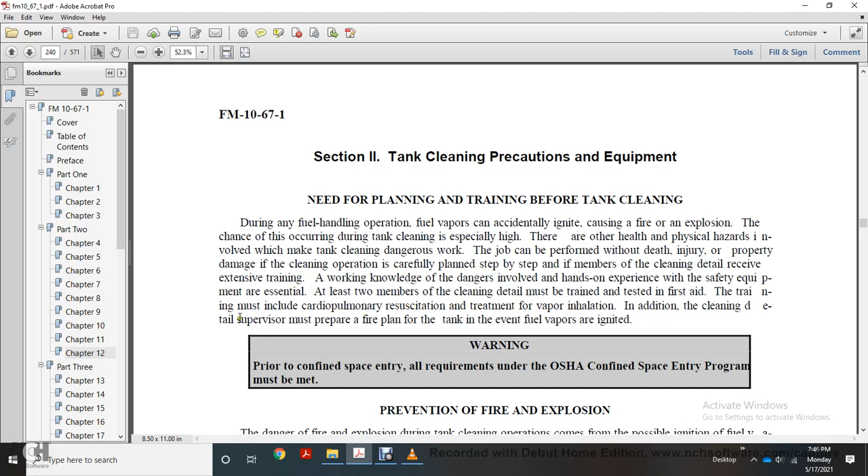The members of the cleaning detail receive extensive training, working with the dangers involved and hands-on experience with the safety equipment that is essential for all members of the cleaning detail. The details must be trained and tested. First aid training must include cardiopulmonary resuscitation for vapor inhalation. In addition, cleaning detail supervisors must prepare a fire plan for the tank in the event the fuel vapors ignite. Warning: confined spaces. All requirements of the OSHA confined space entry program must be met.

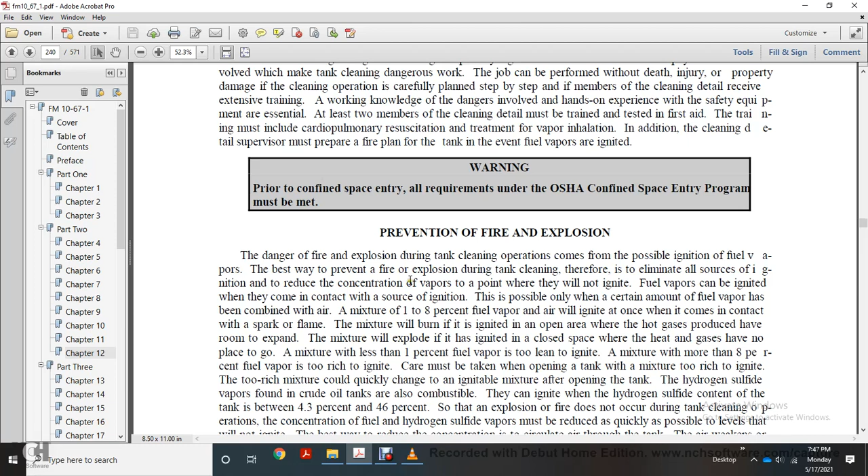Prevention of fire and explosion. The danger of fire and explosion during the tank cleaning operation comes from the possibility of ignition of fuel vapor. The best way to prevent fire and explosion during tank cleaning is to eliminate all sources of ignition and to reduce the concentration of vapors below the point where they will ignite. Fuel vapors can be ignited when they come in contact with a source of ignition only if a certain amount of fuel vapor has been combined with the air. A mixture of 1 to 8% fuel vapor will ignite at once if it comes in contact with a spark or flame.

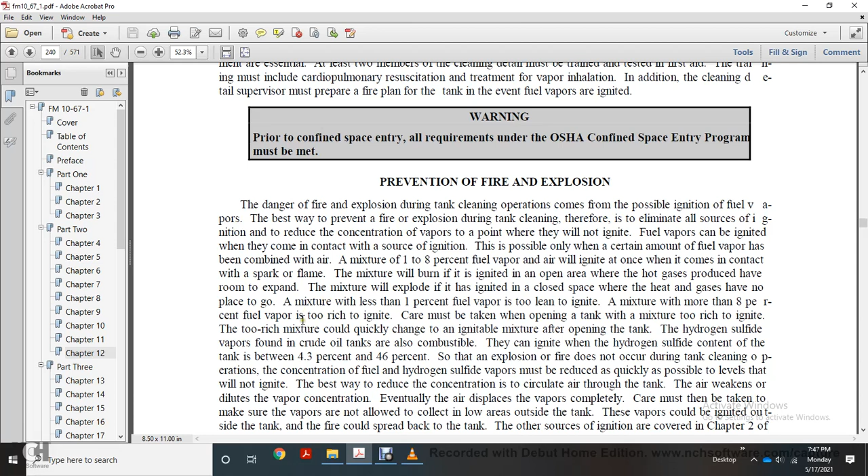The mixture will burn when ignited in open air, where the hot gases produced have room to expand. The mixture will explode when ignited in a closed space, where the heated gases have no place to go. A mixture with less than 1% fuel vapor is too lean to ignite. A mixture with more than 8% fuel vapor is too rich to ignite. Care must be taken when opening a tank with a mixture too rich to ignite. The too rich mixture will quickly change into an ignitable mixture after opening the tank.

Hydrogen sulfide vapor found in crude oil tanks can also ignite when the hydrogen sulfide content of the tank is between 4.3% and 46%. So that explosion and fire do not occur during the tank cleaning operation, the concentration of fuel or hydrogen sulfide vapor must be reduced as quickly as possible below the level that will ignite. The main way to reduce the concentration is to circulate air through the tank. Air weakens the vapor concentration as it dilutes it. Eventually, the air displaces the vapors completely.

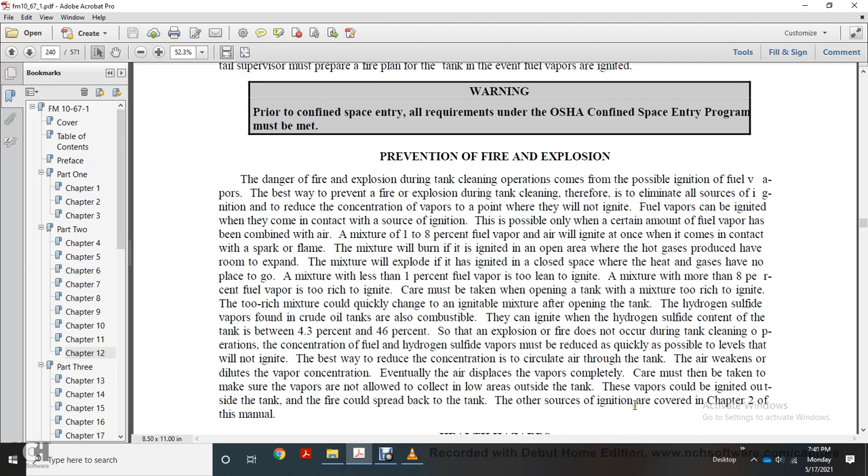Care must be taken to make sure the vapors are not allowed to collect outside the tank. If the vapors are ignited outside of the tank, the fire could spread back to the tank. The other sources of ignition are covered in Chapter 2 of this manual. Health hazards. Until the atmosphere inside the tank has been made safe, the tank is hazardous to health. The danger lies in several areas.

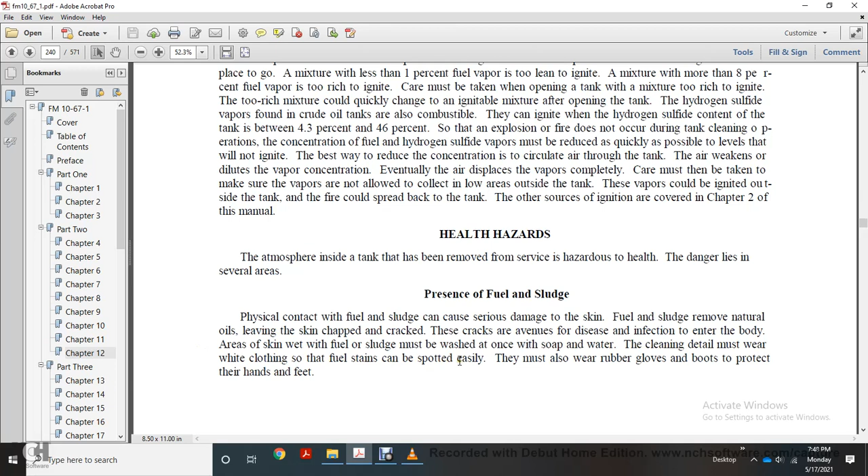Presence of fuel and sludge. Physical contact with fuel and sludge can cause serious damage to the skin. Fuel and sludge remove the natural oils, leaving the skin chapped and cracked. Cracks are avenues for disease and infection to enter the body. Areas of skin wet with fuel and sludge must be washed at once with soap and water. Cleaning details wear white clothing so that fuel stains can be spotted easily. They must also wear rubber gloves and boots to protect hands and feet.

Presence of fuel vapor. Fuel vapors, especially gasoline and jet fuel, are narcotic. Inhaling these vapors slows the central nervous system to the point that breathing stops. In addition, inhaling even small amounts of these vapors irritates the lungs and respiratory system, causing pneumonia and leaving a person open to other respiratory diseases. The toxic limit is 500 parts per million. Cleaning details must wear respiratory equipment while working until tests of the fuel vapors produce readings below the limit. Workers may work in the tank up to 8 hours without respiratory equipment.

Does not apply with a tank that has been used to store leaded fuels. Present is tetraethyl lead. Tetraethyl lead is a poisonous liquid. Contact with tetraethyl lead can result in lead poisoning. Therefore, care must be taken to enter a tank that had been used to store leaded fuel.

Inhaling fuel vapors can kill. The cleaning detail must wear respiratory equipment when working in a leaded fuel storage tank. The equipment must be used even after the tank has been tested and declared vapor-free for inhalation. Dust particles from scale on the walls can also result in death.

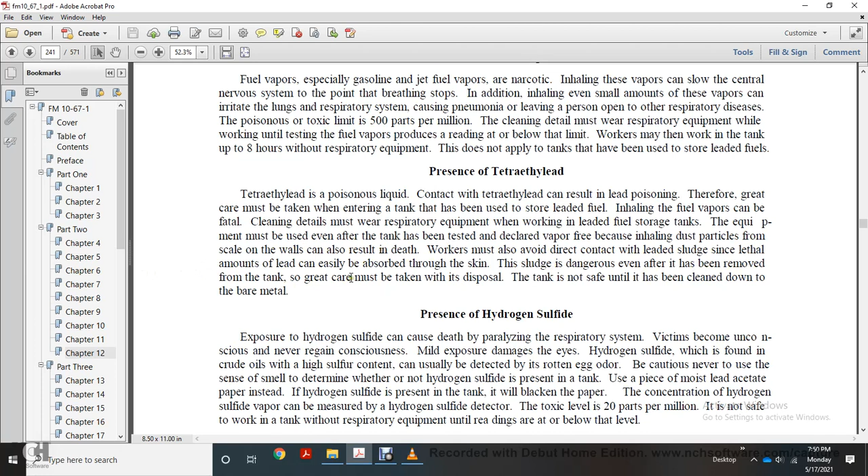Workers must avoid direct contact with lead sludge, since lethal amounts of lead can be absorbed through the skin. Sludge is dangerous after it has been removed from the tank, so great care must be taken with disposal. The tank is not safe unless it has been cleaned down to the bare metal.

Presence of hydrogen sulfide. Exposure to hydrogen sulfide can cause death by paralyzing the respiratory system. Victims can become unconscious and never regain consciousness. Mild exposures damage the eyes. Hydrogen sulfide, which is found in crude oil with a high sulfur content, is usually detected by its rotten egg odor, but it can deaden the sense of smell.

To determine whether hydrogen sulfide is present in the tank, use a piece of moist lead acetate paper. If hydrogen sulfide is present in the tank, it will blacken the paper. Concentration of hydrogen sulfide vapor may be measured with a hydrogen sulfide detector. The toxic level is 20 parts per million.

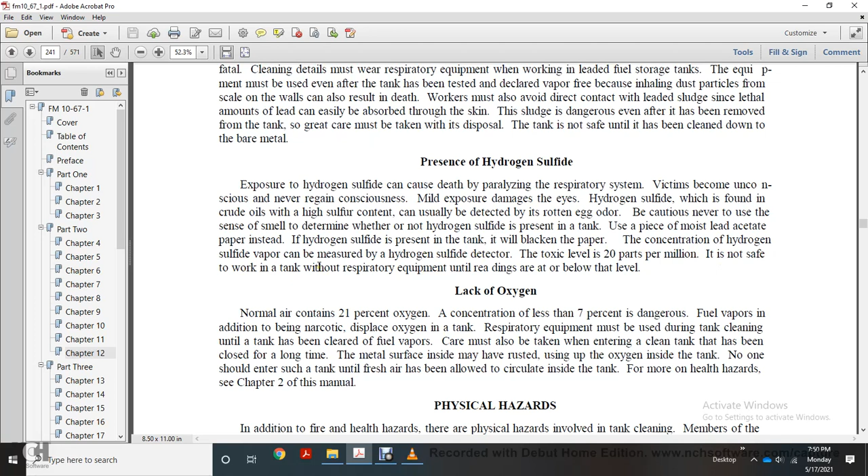It is not safe to work in the tank without respiratory equipment until readings are at or below that level. Lack of oxygen. Normal air contains 21% oxygen; concentrations less than 7% are dangerous. Fuel vapors can have a narcotic effect and displace the oxygen in the tank.

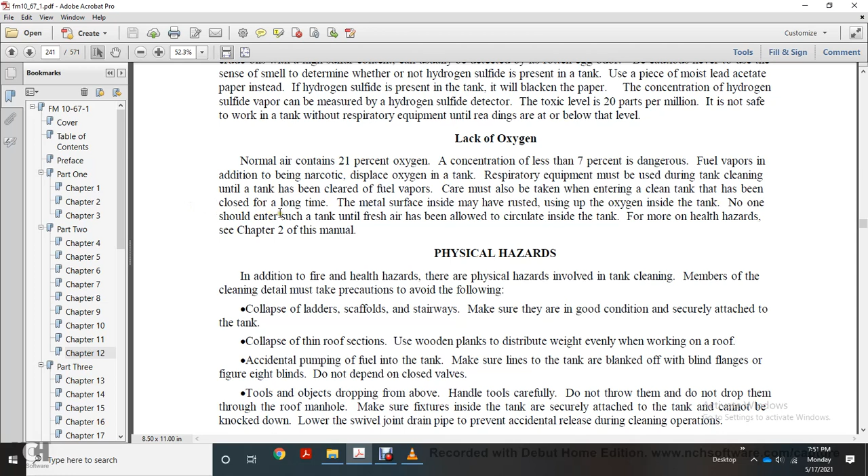Respiratory equipment must be worn during tank cleaning until the tank has been cleared of fuel vapors. Care must also be taken when cleaning a tank that has been closed for a long time. Metal surfaces inside may have rusted, using up oxygen inside the tank. No one should enter the tank until fresh air has been allowed to circulate inside the tank. For more health hazards, see Chapter 2 of this manual.

Physical hazards. Fire and health hazards are not the only hazards in tank cleaning. Remember the cleaning detail precautions. Avoid the following: collapse of ladders, scaffolds, and stairways. Make sure they are in good condition and securely attached to the tank. Collapse of thin roof sections. Use wood planks and distribute weight evenly when working on the roof.

Accidental pumping of fuel into the tank. Make sure the lines to the tank are blanked off with blind flanges or figure 8 blinds, and do not depend on closed valves. Tools or objects dropping from above. Handle tools carefully. Do not drop them through the roof manhole. Make sure fixtures inside the tank are securely attached so they cannot be knocked down. Lower the swivel joint drain pipe to prevent accidental release during the cleaning operation.

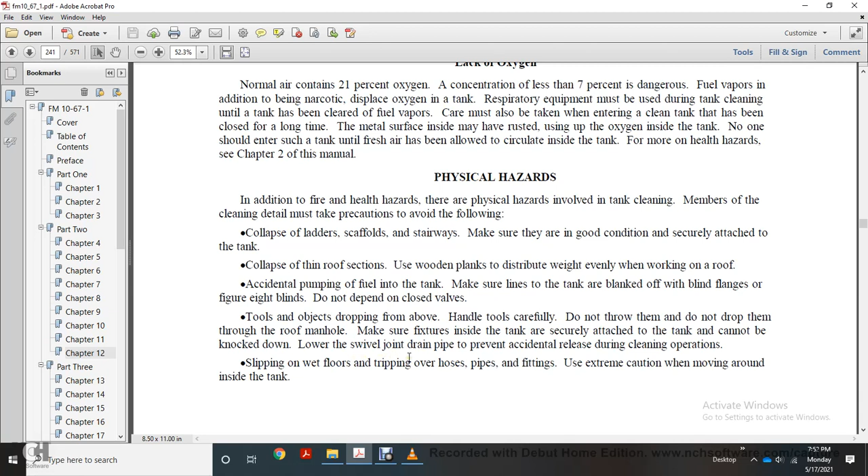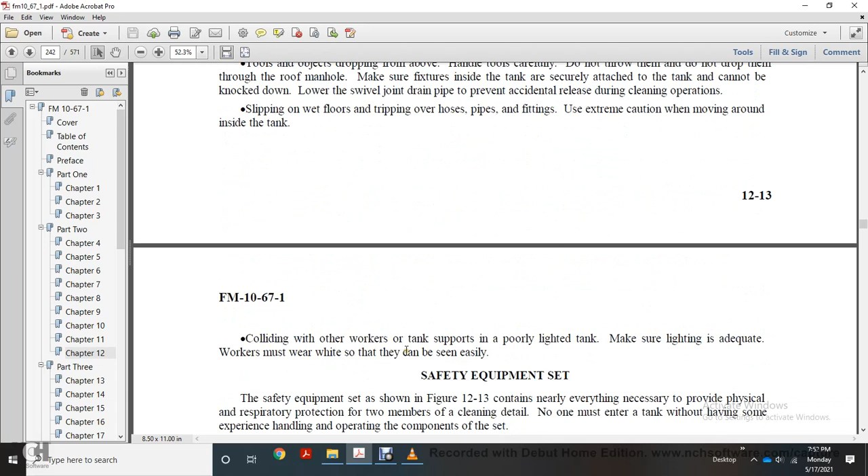Slipping on wet floors or tripping over hose and pipe fittings due to the necessity of moving them around inside the tank. Colliding with other workers and tank supports in a poorly lighted tank. Make sure lighting is adequate. Workers wear white so they can easily be seen.

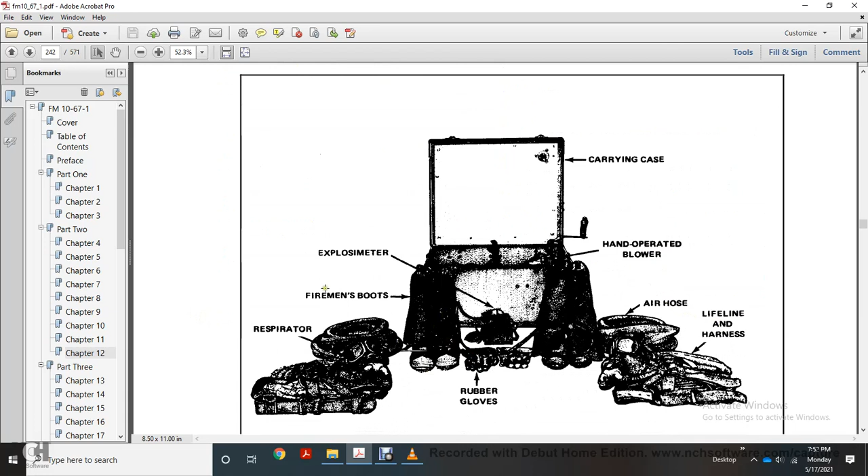The safety equipment shown in figure 12-13 contains nearly everything necessary to provide physical and respiratory protection for two members of the cleaning detail. No one must enter the tank without having some experience handling and operating the components. Shown are the carrying case, blower, air hose, lifeline, harness, rubber gloves, boots, explosimeter, and respirator.

They must be worn inside all other tanks that have been tested and found to be worn inside clean tanks that have been closed for a long time. Precaution must be taken of respirators and air hoses. Inspect your respirators before each use. Also inspect them before they are stored. Make necessary repairs and ensure the respirator is ready for use at all times.

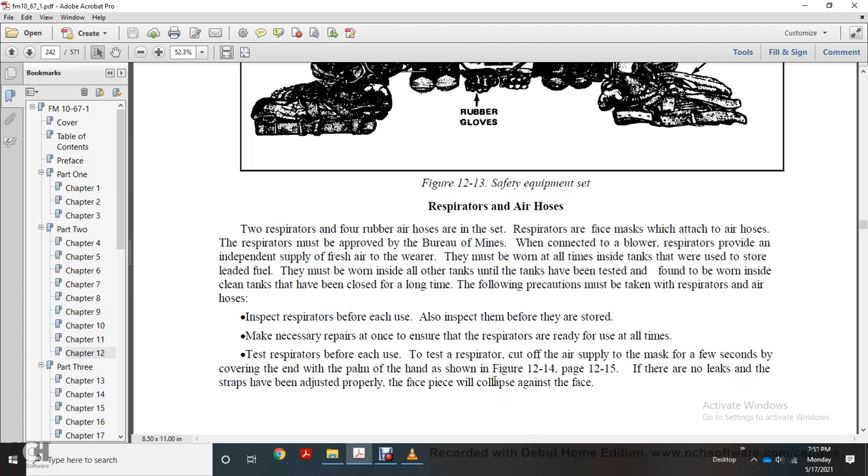Test the respirator before each use. Test the respirator by cutting off the air supply to the mask for a few seconds by covering the end with the palm of the hand, shown in figure 12-14, page 12-15. If there are no leaks and the straps have been adjusted properly, the face piece will collapse against the face. When attaching respirators and air hoses, make sure the connections are tight to provide an airtight seal.

Never remove the respirator while inside the tank. The tank may have been vapor-free; face pieces could still be contaminated. When entering a tank, lift the air hose over the edge of the manhole and pad the edge of the manhole to prevent damage to the hose. Remember the cleaning detail. Someone must be assigned to tend the air hose and to keep the worker under observation at all times. The attendant must be dressed, outfitted, and ready to enter the tank to rescue an unconscious or injured worker.

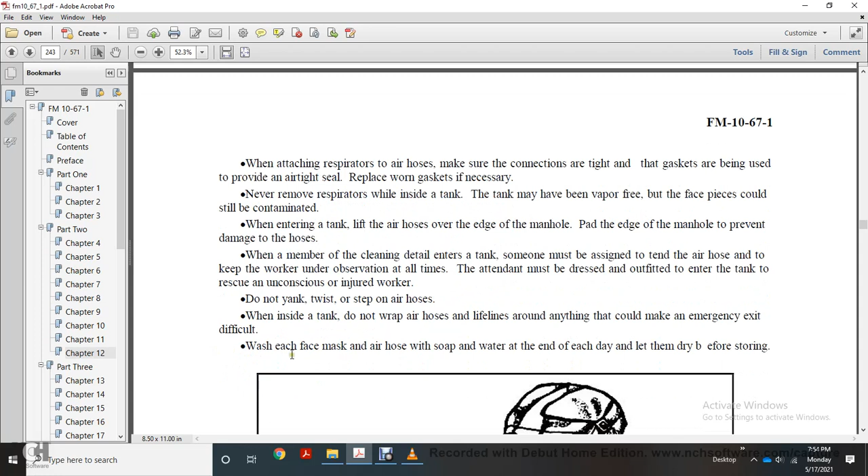Do not yank, twist, or step on the air hose while inside the tank. Do not wrap the air hose or lifelines around anything that could make an emergency exit difficult. Wash each face mask and air hose with soap and water at the end of each day. Let them dry before storing. Figure 12-14 shows testing a respirator.

Hand-operated blower. The blower is mounted inside one of the two carrying cases, with the handle detachably mounted on the outside of the case. When the handle is turned, fresh air is fed through the air hose to the respirator. The blower must be set on the windward side of the tank to make sure the cleaning detail is receiving fresh air. Blowers must be tended at all times while workers wear respirators.

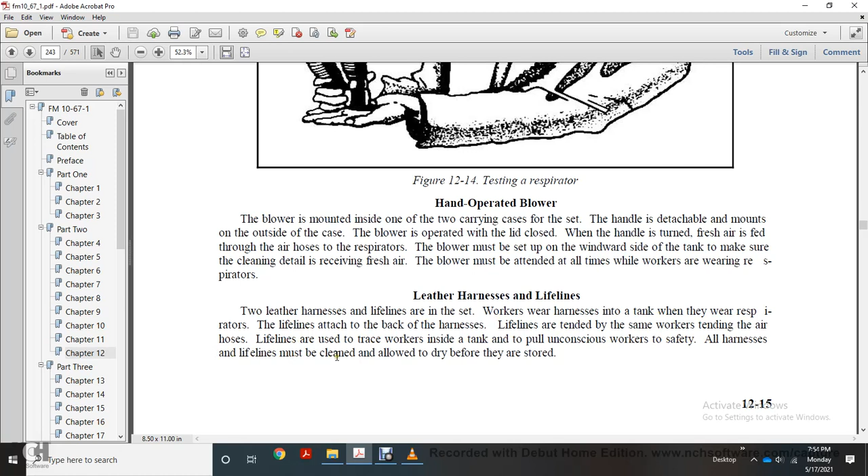Leather harness and lifelines. Workers wear harnesses in the tank along with respirators. Lifelines are attached to the back of the harness. Lifelines are tended by the same worker attending the air hose. Lifelines are used to trace the worker inside the tank and pull an unconscious worker to safety. All harnesses and lifelines must be clean and dry before they are stored.

Fireman boots and rubber gloves. Boots and gloves are provided with the safety equipment set, and the fuel-resistant boots have reinforced steel non-slip soles. Boots and gloves must be worn in the tank at all times.

Explosimeter. One explosimeter, combustible gas indicator, shown in figure 12-15, with two sampling bulbs and a probe, is in the safety equipment set. The explosive meter determines how explosive the atmosphere inside the tank is. The explosive meter must be approved by the Bureau of Mines. Figure 12-15 shows the explosive meter.

Operation. Squeezing the rubber bulb draws an air sample through the probe and sampling line into the analyzer unit. The filament inside the unit burns the fuel vapors in the sample. The filament is protected so the rest of the fuel vapors inside the tank are not ignited. The filament is part of an electrical circuit supplied with current by dry cell batteries.

Burning fuel vapors increase the temperature of the filament, which increases the electrical resistance of the filament and creates a voltage imbalance that moves the needle on the dial. On the explosive meter, the greater the concentration of fuel vapors, the higher the reading. The explosive meter reading is not a measure of the percentage of fuel vapor by volume in the tank; it is a measure of how explosive the contents of the tank are.

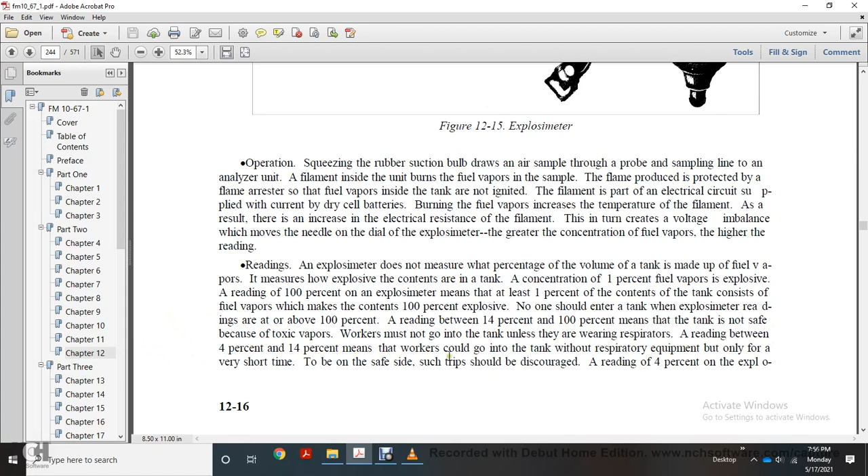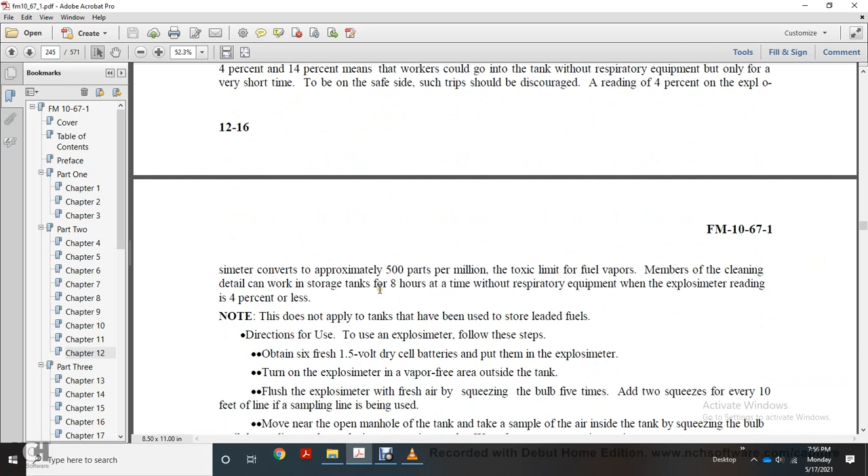A reading of 4% on the explosimeter converts to approximately 500 parts per million, the toxic limit of fuel vapors for members of the cleaning detail working in the storage tank 8 hours at a time. Respiratory equipment is required unless the explosimeter reading is 4% or less.

This does not apply to tanks that have been stored with leaded fuel. Directions for use. To use the explosimeter: fit it with 6 fresh 1.5 volt dry cell batteries and put them in the explosimeter.

Turn on the explosimeter in a vapor-free area outside of the tank, and flush the explosimeter with fresh air by squeezing the bulb 5 times, plus 2 squeezes for every 10 feet of sampling line to be used.

Move near the open manhole of the tank and take a sample of the air inside the tank, squeezing the bulb until the reading on the explosimeter remains steady, while wearing protective equipment.

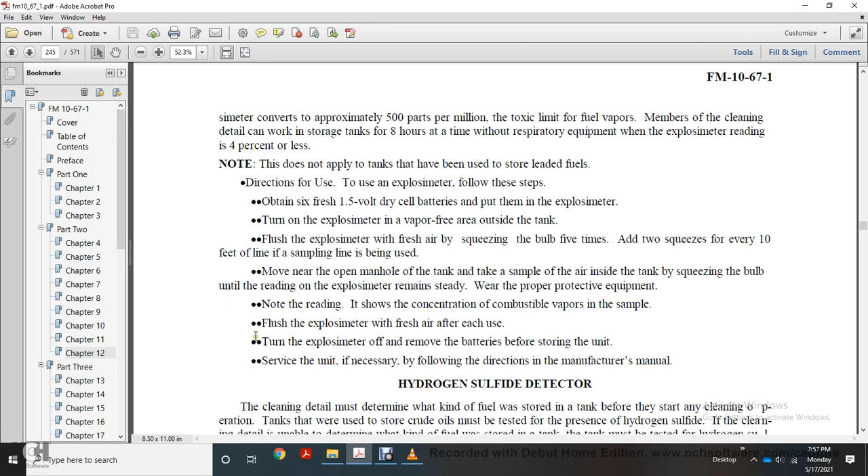Note the reading, which should indicate the concentration of combustible vapors in the sample, then flush the explosimeter with fresh air after each use. Turn the explosimeter off and remove the batteries before storing the unit. Service the unit, if necessary, according to the manufacturer's manual.

Using the hydrogen sulfide direct detector: the cleaning detail must determine the kind of fuel stored in the tank before starting operations on the tank chosen for cleaning. Crude oils must be tested for the presence of hydrogen sulfide.

If the cleaning detail is unable to determine the kind of fuel stored in the tank, the tank must be tested for hydrogen sulfide to be on the safe side. Respiratory equipment must be worn during the test.

The hydrogen sulfide detector, shown in figure 12-16, consists of a suction bulb and a glass detector tube frame with a scale. Break off the end of the glass detector tube and insert the tube into the frame. Squeeze the bulb 10 times to draw the sample into the tube, then read the scale, which shows the percentage, for example 4.3%.

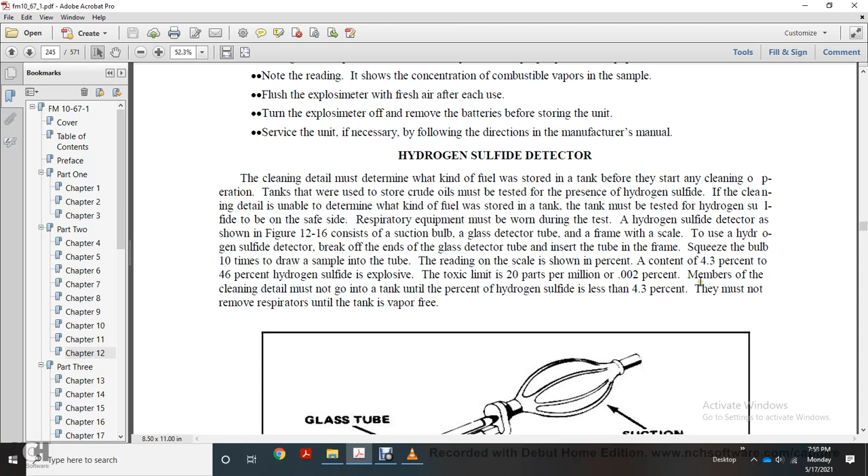A reading of 4.3% hydrogen sulfide is explosive, with a toxic limit of 20 parts per million, or 0.002%. Members of the cleaning detail may go into the tank only when the hydrogen sulfide percentage is less than 4.3%, and they must not remove their respirators until the vapor in the tank is vapor free.

Figure 12-16 shows the hydrogen sulfide detector: glass tube, frame, and suction bulb.

For a fire extinguisher: a fire caused by ignited vapor is a Class B fire, fought with loaded stream foam or carbon dioxide dry chemical extinguishers, also rated Class B. These extinguishers are available in hand and wheel units. Members of the cleaning detail must know how to operate fire extinguishers effectively for the specific stage of the fire, so the cleaning detail should be trained accordingly. See Chapter 2 for more information on fire classes and extinguishers.

Regarding protective clothing and equipment: members of the cleaning detail must wear clean white cotton overalls when they go inside the tank. White is chosen so stains can be seen easily, and fuel stains can be identified easily. Cotton must be used because it cuts down the generation of static electricity.

Section 3: storage tank cleaning.